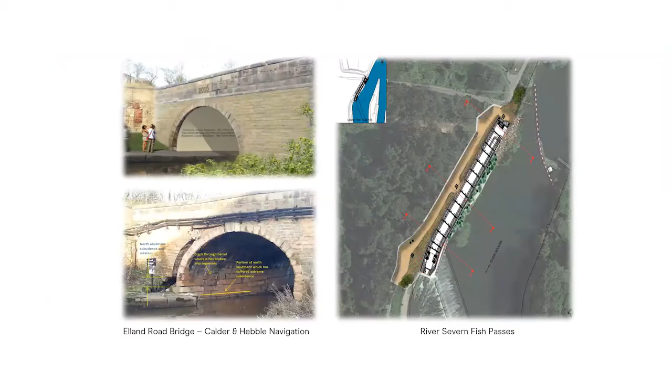Here are just some examples of the projects that the National Delivery Planning Team has been involved with. These are some of the few graphics in this presentation, so I hope you enjoy these before it gets quite text heavy. But just a couple of examples here.

A bridge restoration, the River Severn Fish Passes project, which my colleague Phil Smith, who's also on the presentation, has been involved with. Also a couple of yards that we run and manage.

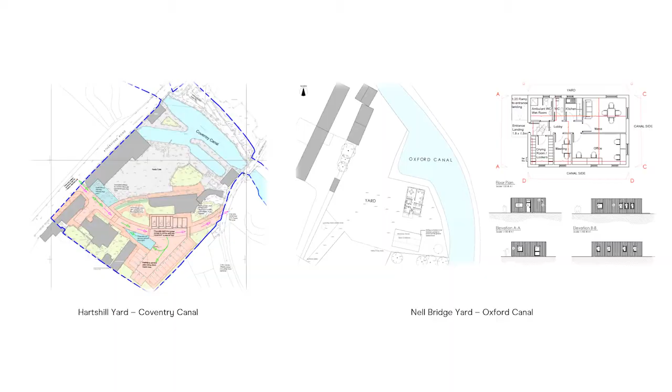These are welfare facilities for volunteers and staff involved with the canal, and a couple of residential mooring sites where we installed the infrastructure there - facilities, parking, toilet blocks - for all those residential mooring customers.

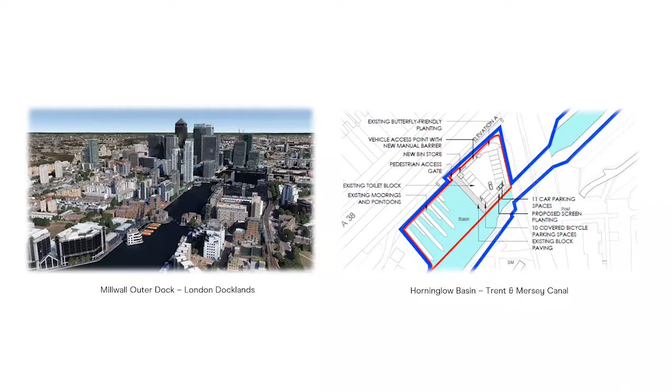So is planning permission required? That's the starting point for this talk. Generally, yes, is the straightforward answer.

It's needed if the development or works carried out meet the statutory definition of development, set out in section 55 of the Town and Country Planning Act. Breaking that down: building operations, so anything to do with structural alterations, construction, rebuilding, and most demolition, and engineering operations such as groundwork. I've highlighted those as the most important ones to be aware of for restoration.

Essentially most projects undertaken in relation to restoration will require planning permission, though I'll caveat that later. There are some works that don't require it: any internal operations, so if part of your restoration involves interior alterations, those don't require consent, and any operations that don't affect the external appearance. Same with changes of use, although those are probably rarer on restoration projects.

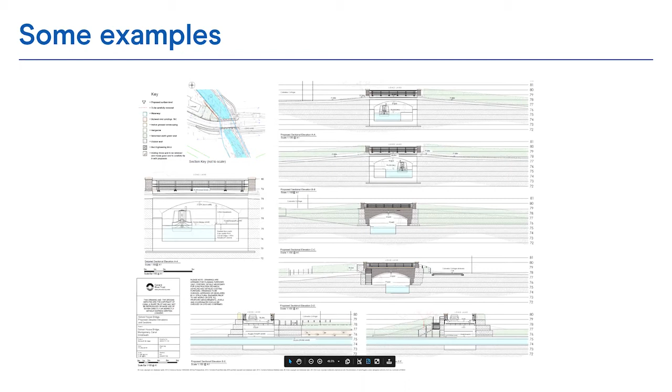So once you've submitted your application, or whilst you're preparing it rather, it's a good idea to undertake consultation before submitting it. It's essentially public consultation - explain your proposal to local residents, local members, councillors, parish councils, interest groups. The idea is to avoid or be aware of issues that might come up once your application has been submitted.

It's a good idea to be able to respond to issues. It's very tempting to just say, this is what we're doing, we're just telling you about it. But in practice, if people have concerns, it's always worth trying to address those up front before submitting the application. The last thing you want is for people to start objecting whilst the application is with the council.

That will complicate matters, and it's harder to make changes at that stage. During COVID-19, there's been a significant move towards online consultation - use of social media to explain proposals, video calls, Zoom calls with parish councillors to explain what the project's about. It's a good way of speaking to them when you can't meet on site.

Videos are also good - showing a video walkthrough, just shot on a phone for example, of what you plan to do, with a bit of explanation, voiceover. That will help explain it. It's definitely a good idea.

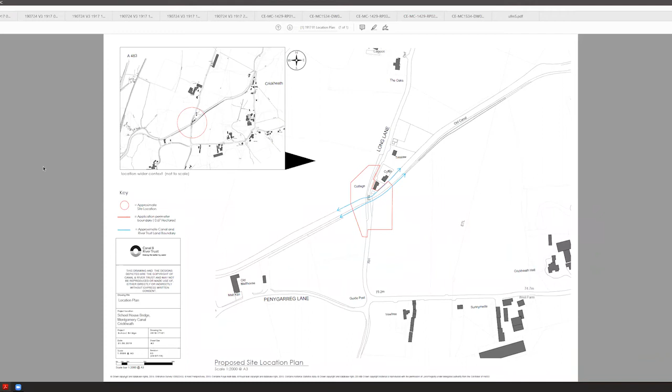Here's an example of a location plan, showing the outline of the site. This is where we were proposing to construct a new bridge over the Montgomery Canal to allow boats to pass underneath it. This had all been filled in, so there was just a road on top, so we needed to remove that, build a new bridge, and then boats go underneath.

A few more details. There's different scale plans, so you'd usually have a layout plan, site location plans - that's context next to the nearest village, for example - and a site location plan zoomed in with more detail.

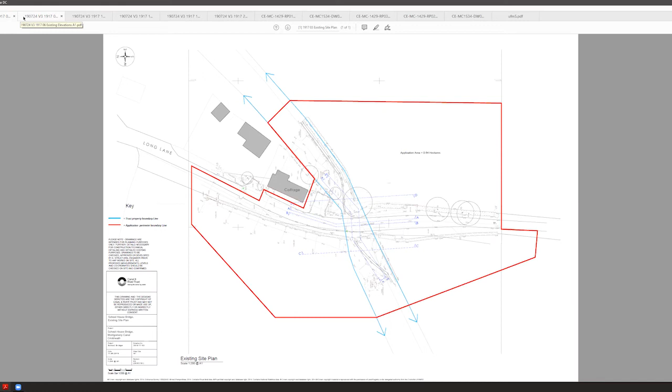This is the existing site plan, showing what's there at the moment. We've got existing elevations, so you can see the bridges going round here. It's quite hard to see on those plans, but that shows the current context of the site.

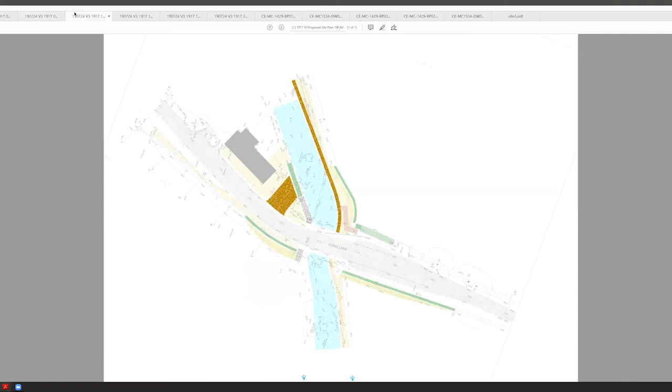We've then got a proposed site plan. This shows the indicative route of the canal, location of the new bridge, and all the detail surrounding that. That's like the bird's eye view of the project.

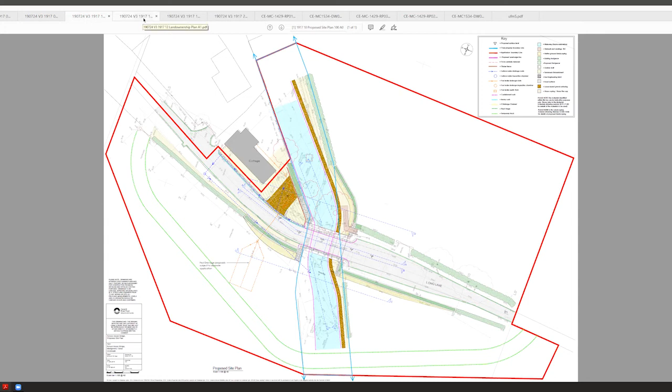Land ownership plan. This particular project had quite complex land ownership. Not all projects will - some will just be owned entirely by the trust or by another trust or organisation, and that will make things a lot simpler.

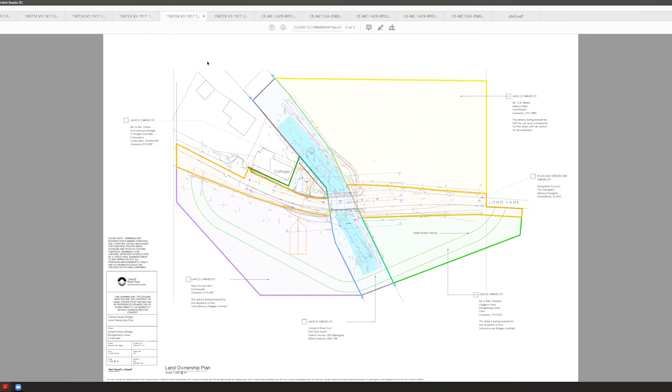This is a good way of showing who owns what, and you can derive the information required for the certificates you've got to submit as part of the planning application from that plan. All the information was taken from land registry and contacts that the restoration partnership were involved with.

This is the sort of detailed elevations and sections. As you can see, they're detailed and show indicative materials. You can very clearly see what's been proposed via these plans, and these were all developed from just sketches of the scheme, put into CAD, and with that we were able to work with changing scales and changing materials.

Any tweaks that are required could all be done relatively easily. Crucially, we've been able to actually measure things - for example, boats, height of the bridge, making sure people could walk through easily. All quite important things, but it's not until you've actually laid it out and have the ability to check that it becomes obvious where there are issues.

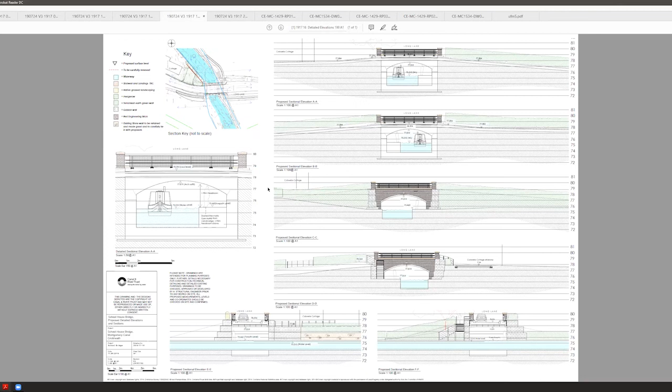Part of that was landscaping, so we had to basically make sure that what we were removing was replaced with suitable replacement planting.

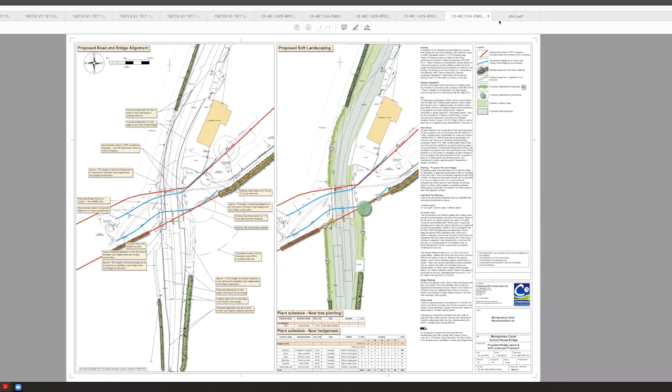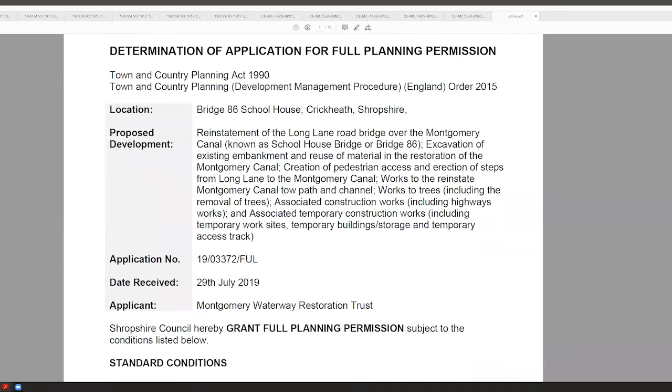So the final thing here is just the decision notice - this is from Shropshire Council. All councils will have a similarly looking decision. It explains the type of development, who's applied, application number, etc. And then you'll have a series of conditions relating to the application - standard timeframes, 3 years for a permission.

It will set out which drawings have been approved, and those are listed at the end of this document. There are various different conditions here that will require approval before the development commences. For example, condition 4 here requires details of the bricks to be used to be submitted, so that the council can check they're happy with what's been proposed, along with a number of other conditions that need to be submitted before the development can commence.

There's another range of conditions that are valid for the lifetime of the development. So you just need to make sure - for example, here they needed a nesting box - we just need to install that and make sure it's retained going forward.

So that's about it in terms of what the decision notice looks like and the sort of types of plans that we'd need to submit as part of the planning application.

And now I'm happy to take some more questions.